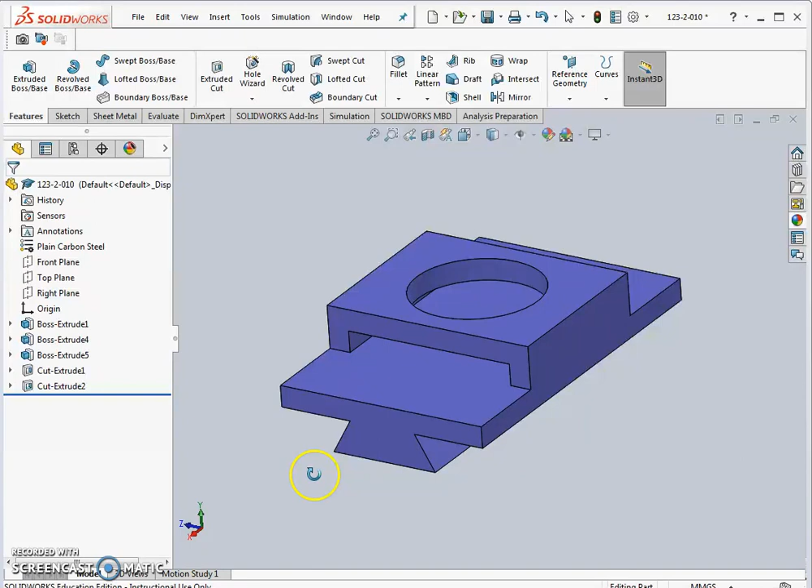Okay, so we're going to look at modeling part number 10 in exercise 2, this component here, and modeling all the features. So again, if we take a quick look at the drawing here, we're going to basically model this shape here and the dovetail, all the separate features. So we'll probably start off with a rectangle at the bottom, 80 by 50, 5mm thick, and take it from there.

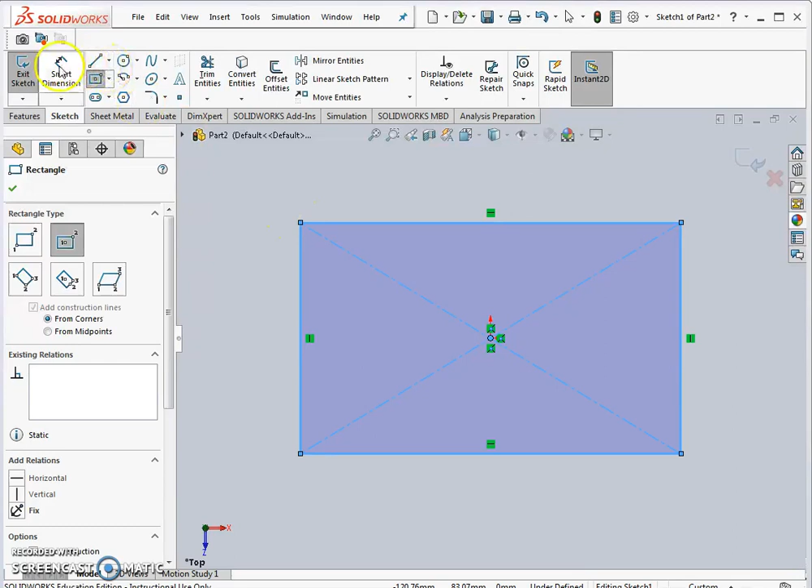So this is the finished part. So let's do it from scratch. So new part file. And we're going to sketch, and again sketch on the top plane, so we're looking straight down on the component, and we use the center rectangle, again taking advantage of symmetry of the part. Smart dimension 80mm by 50mm, and that's that complete. Exit sketch, and we're going to extrude that distance of 5mm, and OK.

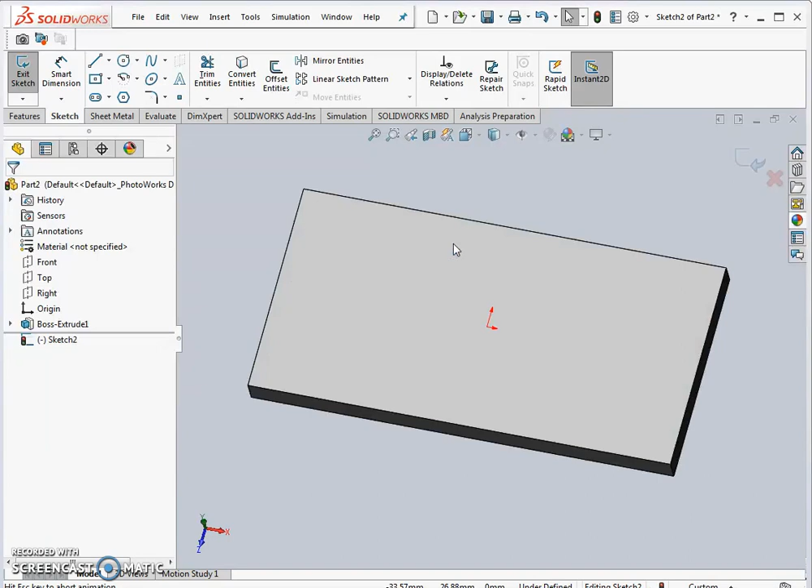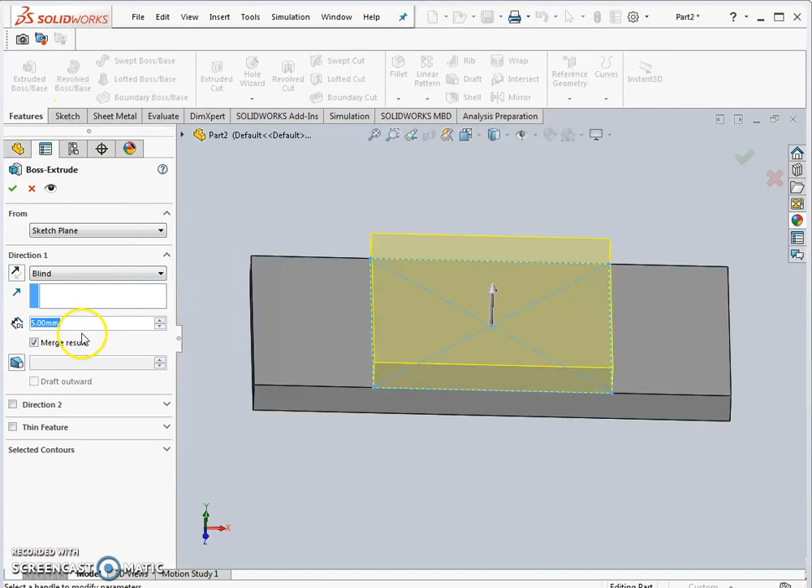We're going to just stack up on top of this, so sketch on the top surface again, Control and 8, it's good practice, center rectangle yet again, and snap on the end of the part there. So now all we do is give it a length, which is 40mm. The width is already fixed. Exit sketch, features, extrude, and this time we're actually going to extrude it 10mm. I'm going to do some cut features in a moment.

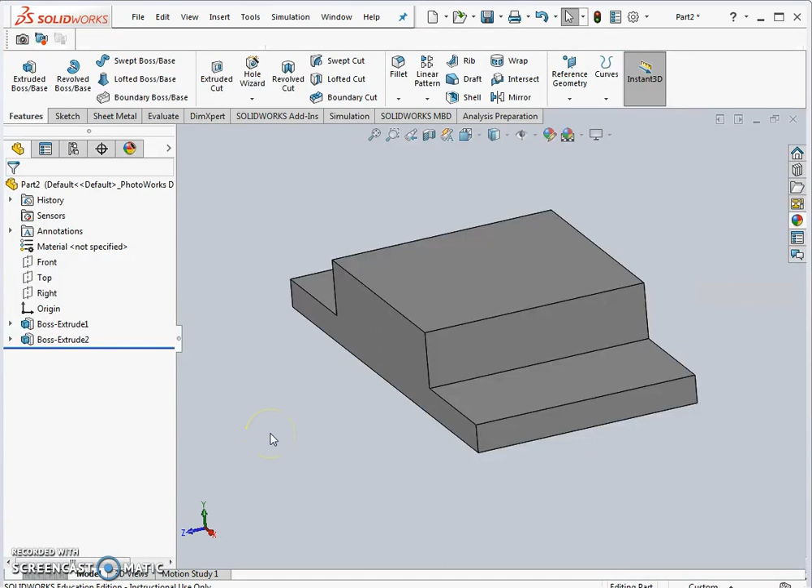We're going to cut from this side in order to get this opening here, which is shown by the dotted lines here as well. So it's 40mm wide the opening and 5mm high. So that's on this face here would be best to sketch. So let's sketch on that face. Control 8, look straight in on it, and we're just going to use a corner rectangle this time,

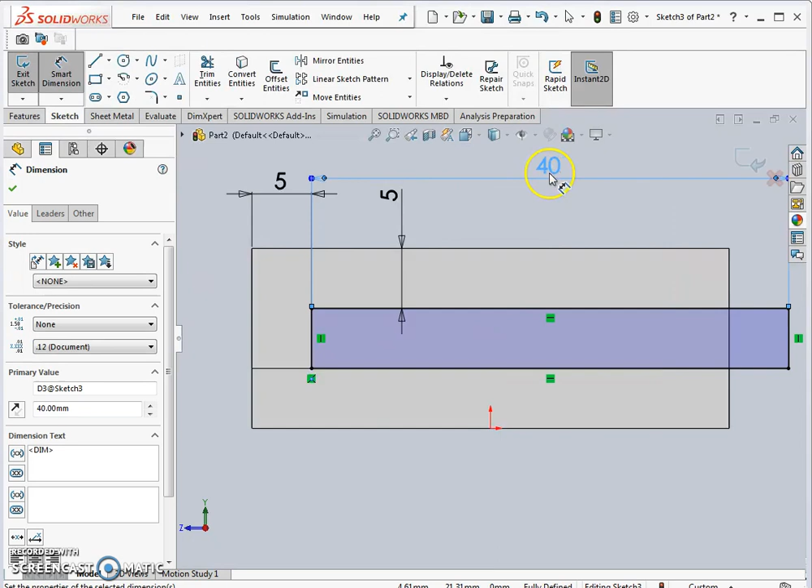like so. We put our smart dimensions in, so this should be 5mm, and again the part's 50 wide and the cut's 40, so again this is 5 here. And we'll give a total width for that of 40, and this will be 5 here left over, no need to dimension that. Exit sketch, features, extrude cut, and we can cut through all and select OK.

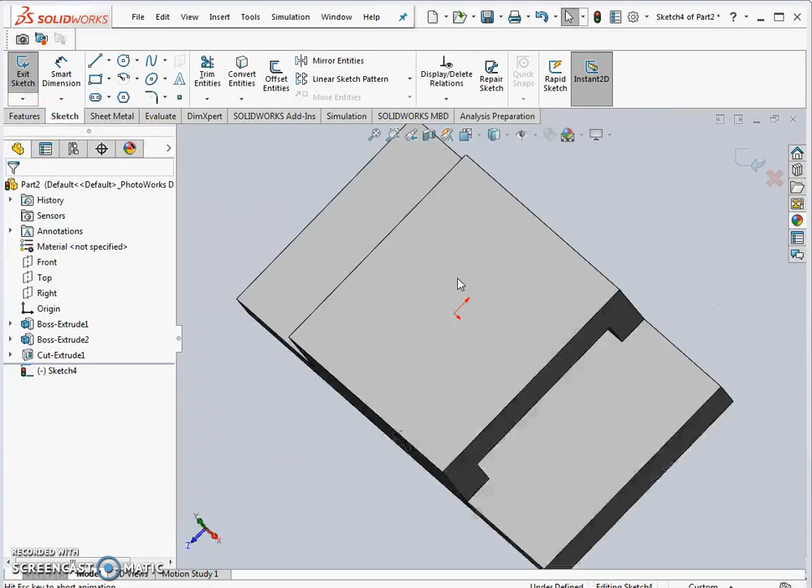Next feature then is the circle on top. It's the die opening. It's a circle here, diameter 30. So sketch, top surface, Control and 8 again, and again the origin in the center, sketching the circle around it, diameter 30, and exit sketch.

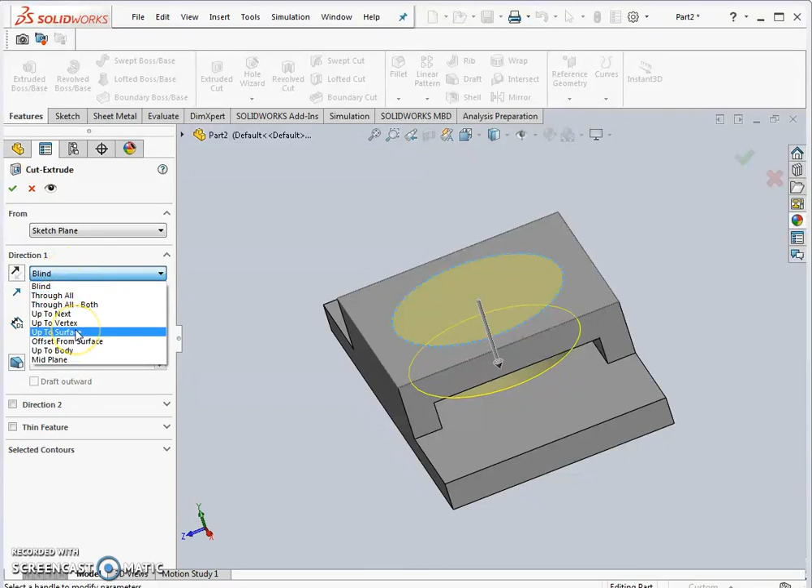Now we're going to cut this, it only goes down this far here, so we can use the features, extrude cut, and we can go up to surface or up to next, but let's do up to surface, try that. Up to this surface here, and select OK. You could just put in 5mm if you like, but that would be a better option.

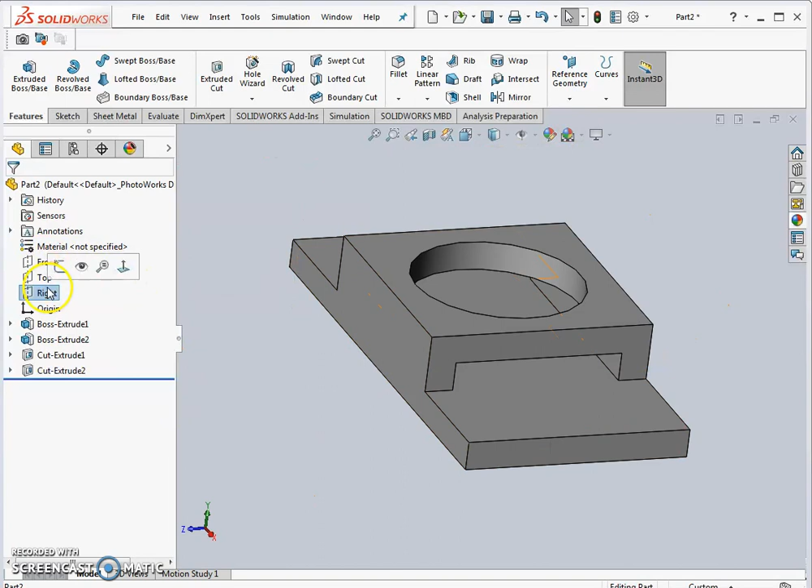So the final thing we want to do with this part is the dovetail. Similar to part 1, I believe it was, when it was a cut in part 1. So again, the dovetail, we can start it with two options. We could start it on this right plane, the plane that goes right through the middle of the part. Yours might be called the right plane, or we could do it on the face. So let's do it on the plane. So sketch, and then Control 8 again to look straight in at it.

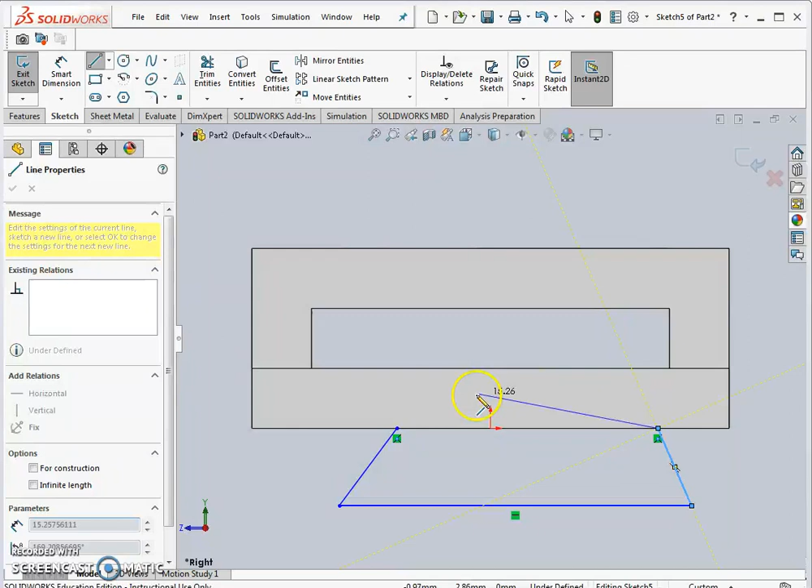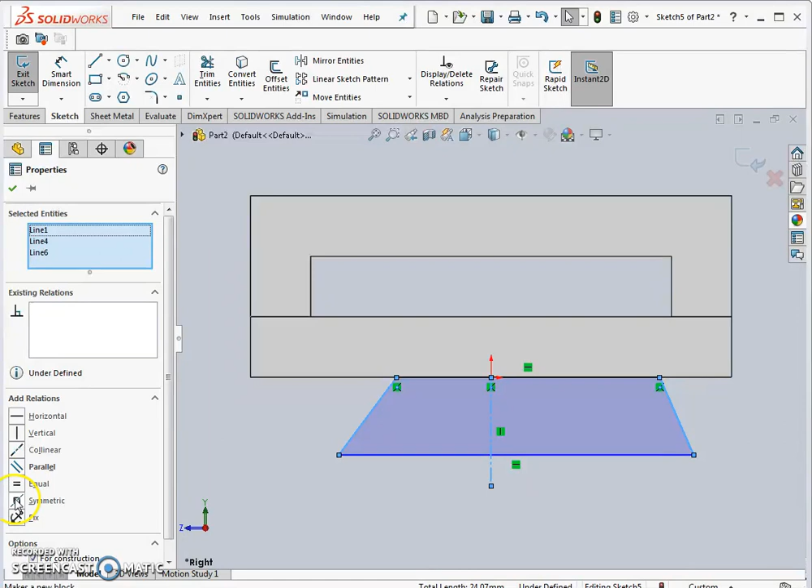So we're just going to add this dovetail, and we just worry about the shape first, any size. So just draw a dovetail, any size. So it's a trapezoidal shape, and in addition to that, we want to do a center line from the origin straight down. The first thing we do is we want to add some constraints. So we're going to select that line, Control, center line, and opposing line. And this is the constraint here we want to add, is make symmetric. So I'll show you down here, symmetric. And you can see the movement of the part.

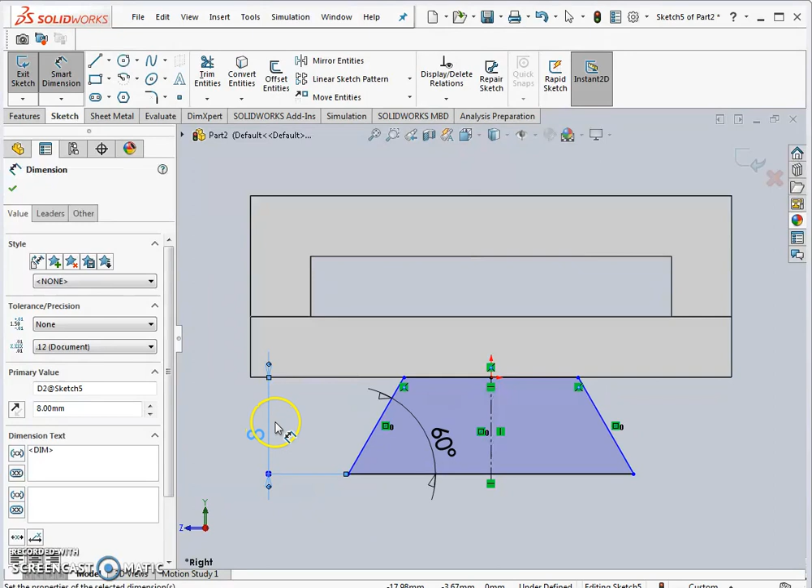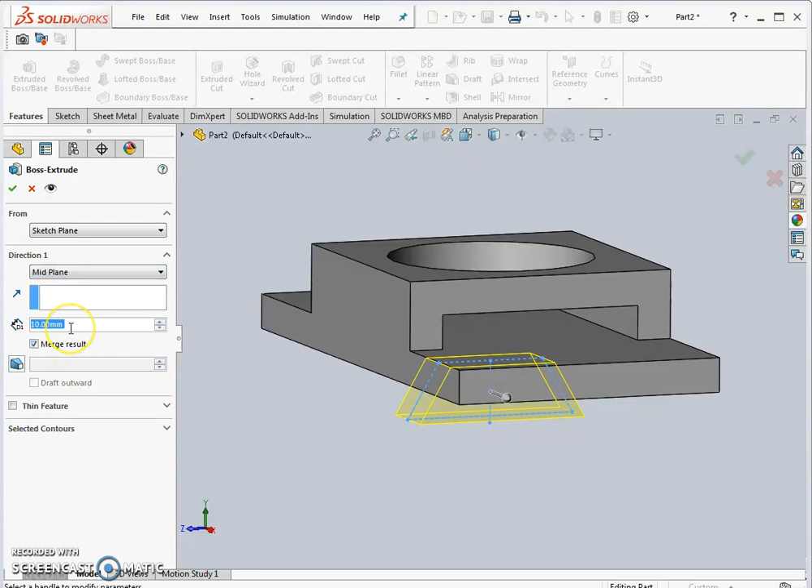And that's really it. So we're just going to add some smart dimensions after that. And simple enough, we know these are 60 degrees. And we know the depth down is 8mm. And we know the distance in, I believe, is 16. It's a narrow part here. And that's the sketching complete. So that's your dovetail. So we can exit sketch, features, extrude boss base. We've already pre-selected. It can be your mid plane again, and the total depth of 80mm, and OK.

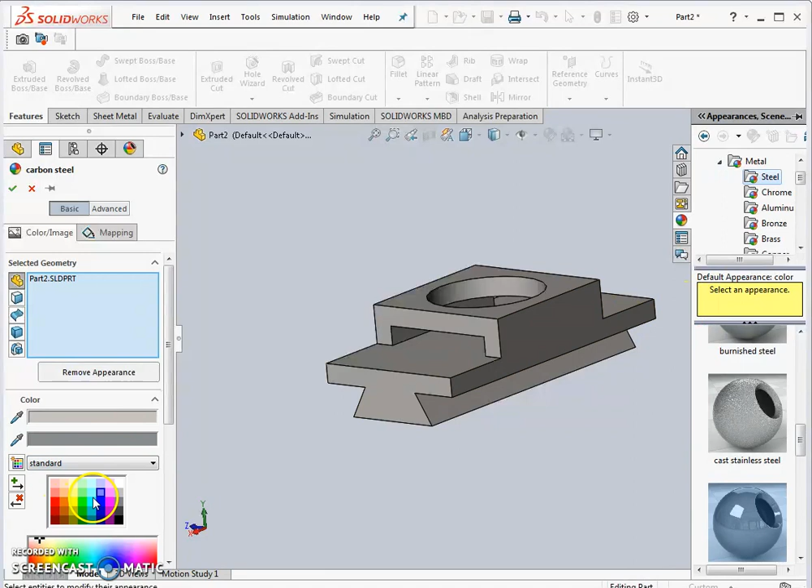So that's the part quickly modeled up. Again, don't forget about your material. We'll assign plain carbon steel. We'll go back and edit these maybe later on, and let's color the part in too. So edit appearance, pull that across there, we can just pick a blue color here. This is the part done and select OK. So that's the part number 10 modeled up.